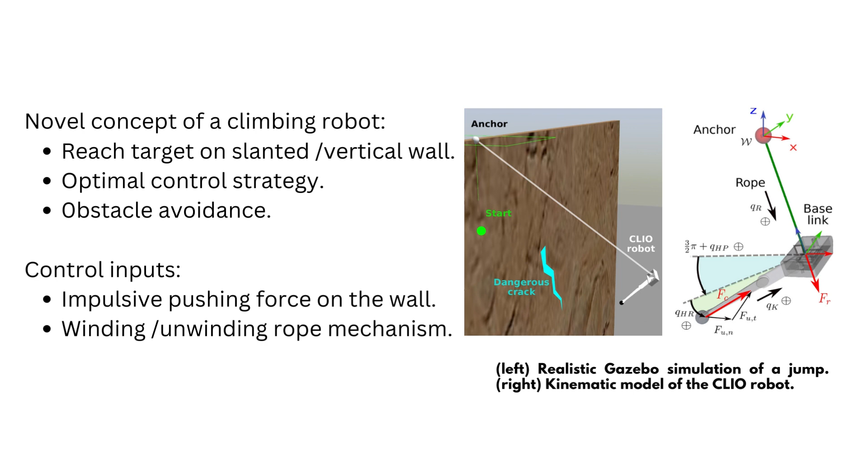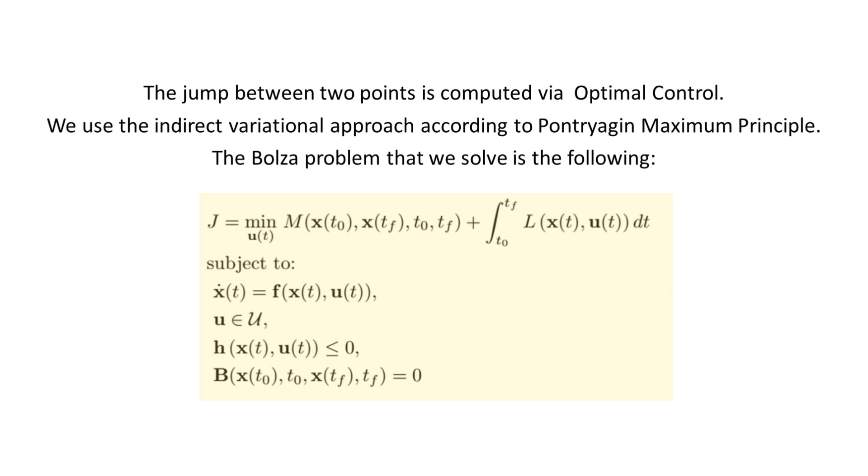The jump between two positions is computed via optimal control. The problem is tackled using the indirect variational approach with the Pontryagin maximum principle. We formulated the optimal control problem as a Bolza problem, subject to ordinary differential equations and bounded controls, with constraints on the states, control, and boundary conditions.

The problem has 6 state variables derived from the cylindrical coordinates of the system, namely, theta, phi, and the rope length L, and their respective derivatives. In addition, there are 3 control variables: the force applied to the wall for jumping, which is decomposed into tangential and normal components, and the winding force of the rope. The jump forces are shaped with a Gaussian function to simulate their impulsive nature. The system's dynamics are obtained using the Euler-Lagrange equation.

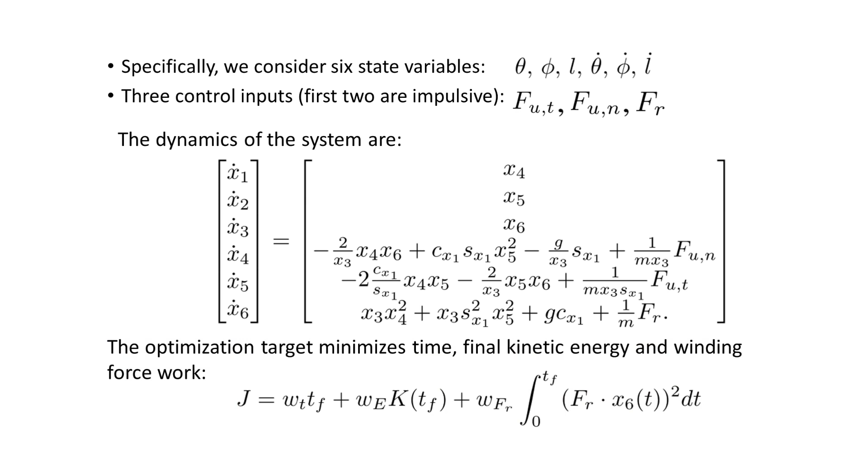The optimization target function has the Mayer term, which includes a weighted sum of the final time and final kinetic energy, and the Lagrange term, which contains the rope retraction winding force contribution. The problem is constrained with respect to the states and control inputs. The first bound is set on the retraction force that can pull but not push the rope.

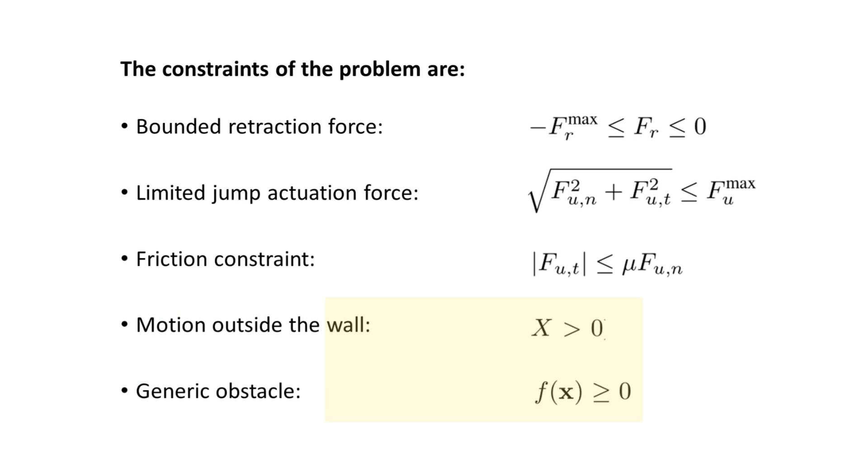Another important constraint limits the actuation force for the jump. Connected to it is the friction constraint, which relates the tangential and normal force impulse. The last 2 constraints are included to ensure that the motion is in front of the wall and not inside the mountain, and to model the wall's surface. We present simulation results that show how the control inputs obtained running the optimization are able to bring the robot to a desired target.

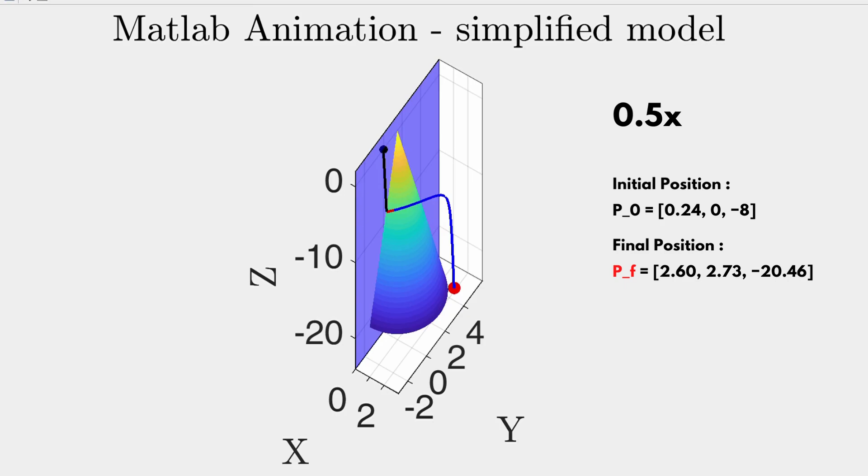In the first experiment, we show a validation of the trajectory in a MATLAB environment with the simplified model. Then we perform the validation with the full 9 degrees of freedom model, showing that the simplified model is a good approximation to plan jump motions that do not involve angular motions. The small error at the target is due to the discrepancy between the models, and the lack of a controller, which are part of future works.

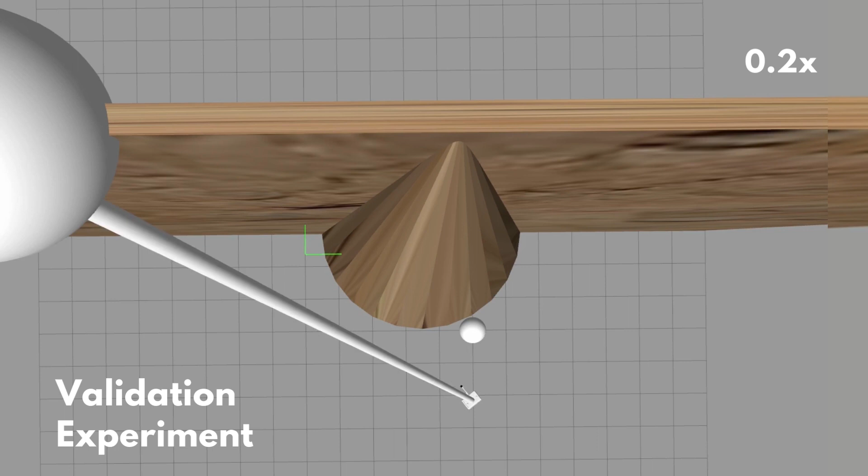Before the liftoff, the leg reorients in the impulse direction to avoid the generation of centroidal moments that would start pivoting motions about the rope axis. Next, we show jumps to different target points from the same liftoff location on the wall.

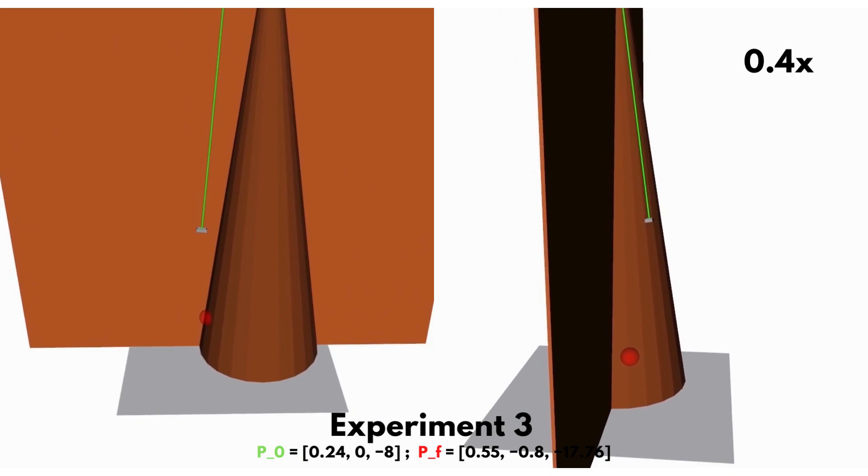In this experiment, we initiated the jump lifting off from the rock pillar, demonstrating the approach is effective also for slanted surfaces.

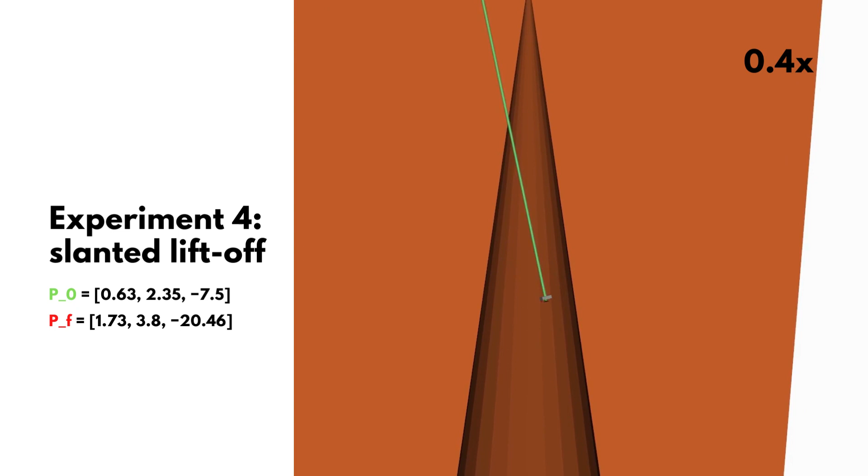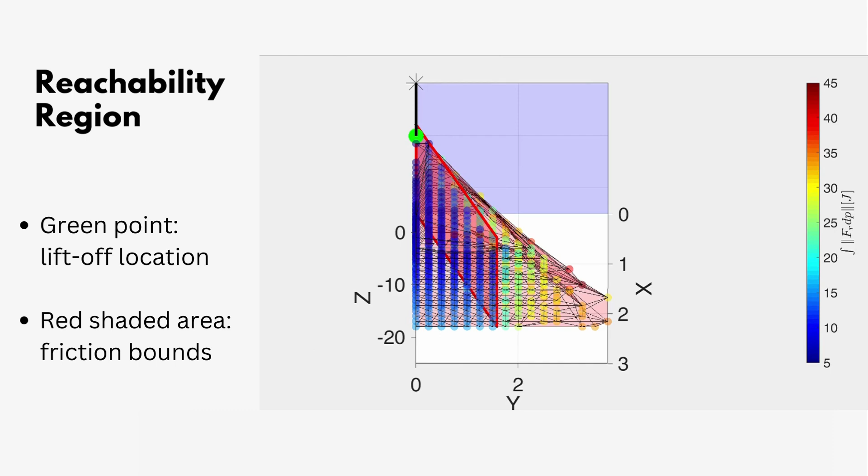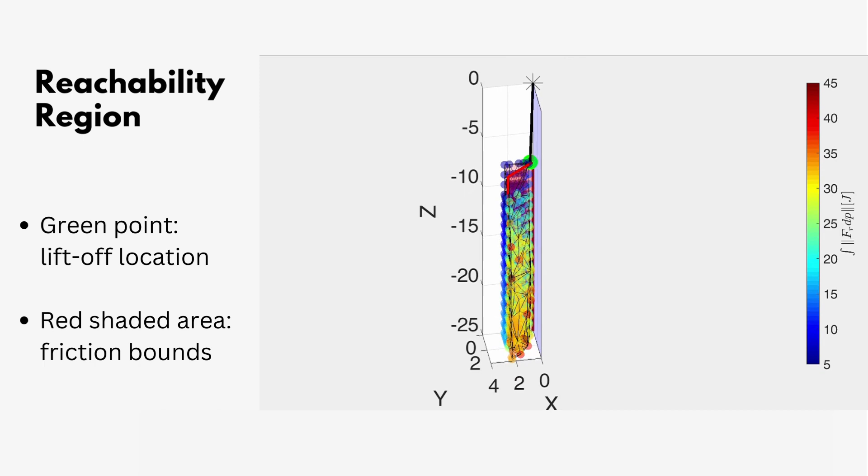Finally, we discovered that the achievable targets are affected by the friction coefficient at the liftoff location. Therefore, we performed a reachability analysis to numerically derive a region of reachable targets. You can see that there is a limited number of targets that are reachable out of the friction boundaries and that they involve high energy consumption from the retraction mechanism.